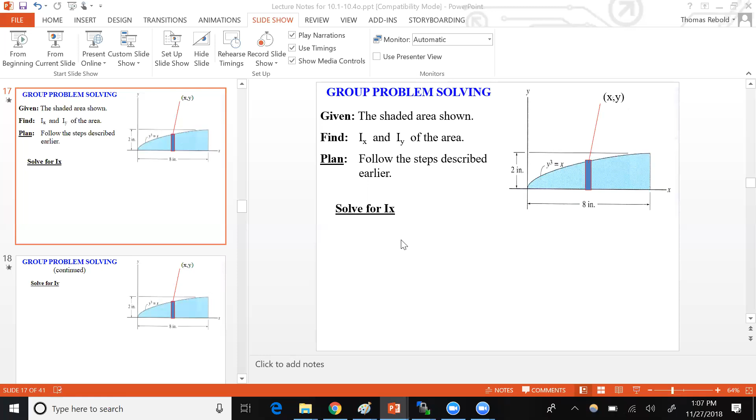So to continue, we are doing moments of inertia. Any thoughts about moments of inertia? It's weird, but it's really just calculus, a certain type. You've done all these kinds of things before, it's not too different from what you've been doing in calculus. We solved a few problems together and learned how you can do vertical strips and horizontal strips and all that stuff.

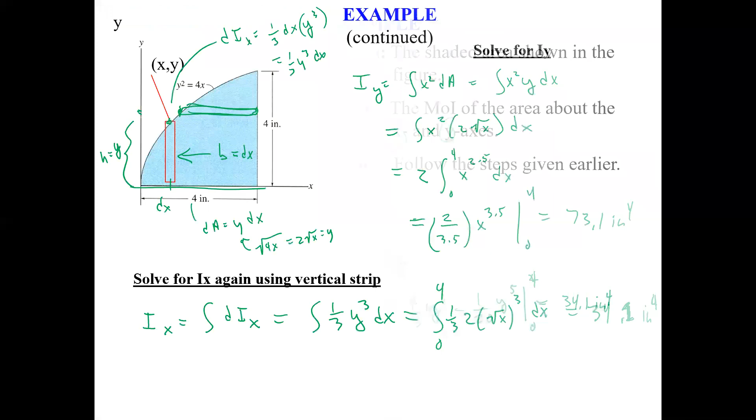There is this, I don't think I put this on your handout. Is this on your handout, the group problem? It is? Good, because you need more exposure to this.

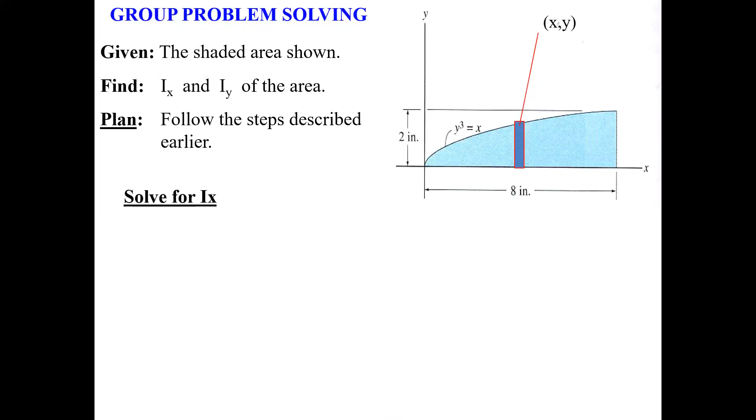So for this one, we're supposed to solve for Ix and Iy. Iy is going to be on that page, and you can do both of those with a vertical strip. Remember, there were two different ways of doing it, right? Just as a review, what were the two formulas? What's the formula for Ix?

If you have a horizontal strip, let's start with a horizontal strip. If you're doing a horizontal strip, what would the formula be? The integral of y squared dA, right? If you're using a vertical strip, what's the formula?

No, it's not. This is a vertical strip here. So there isn't really a single y for this material, for this strip, right? This strip is distributed across y. Remember what the alternative formula is if you got a vertical strip?

Instead of focusing on a dA and how far that is from the axis, since you can't really do that for a vertical strip, right? Because that vertical strip has material that's at different distances from the x-axis, right?

But we found that the moment of inertia of a rectangle about its base is 1/3 the height cubed times the width base, right? So that's sort of what a differential Ix is. You can think about this from a differential Ix point of view, and that's going to equal the integral of 1/3 of y cubed dx.

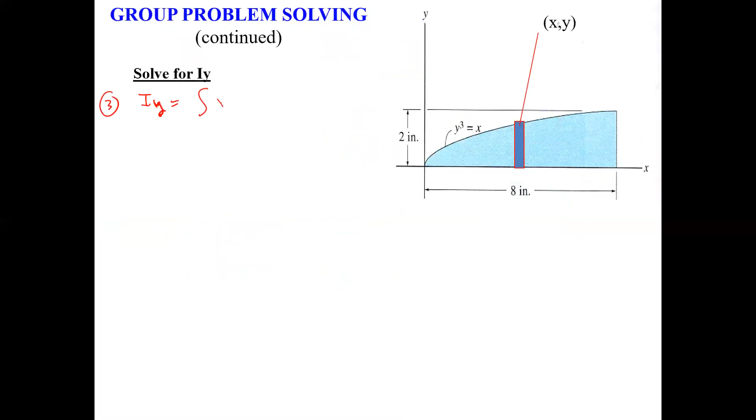I'll give you the answer, you can kind of see if you can prove it. IY is, with a vertical strip, so this is going to be formula, what's that? Formula 3. It's going to be the integral of x squared dA. And in this case, the dA is going to equal, well, the height is going to be y, which equals x to the 1/3, right? And the thickness is going to be dx, right?

And so it's going to be the integral of x squared times x to the 1/3 dx from 0 to 8. And that should equal 307 inches to the 4th. So you can try your hand at the integration and see if you can get that answer.

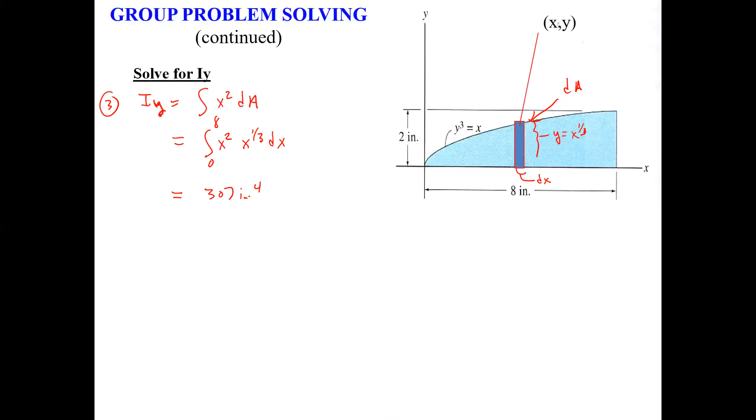Okay, and one more attention quiz. When determining the moment of inertia of the element in the figure, differential IY equals... that would be the sort of, what's the moment of inertia of this area.

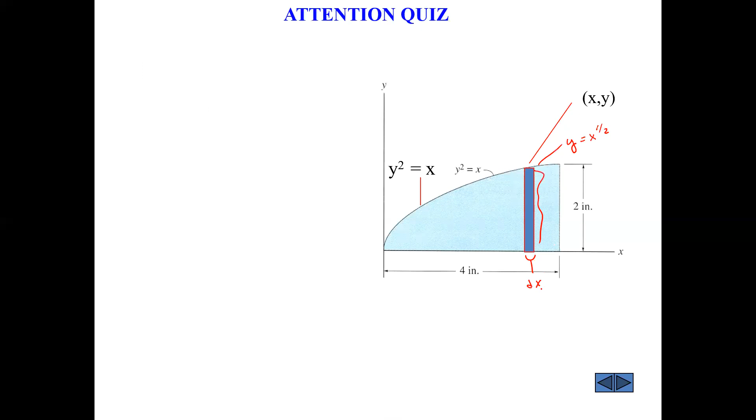Well, this thing has an area of dA, let's see, it's going to have a height of y, which is x to the 1/2, as a thickness of dx, right? And we have to multiply, so the moment of inertia of that little chunk there, our dIy is going to equal x squared times our dA, right? And that's going to equal x squared times x to the 1/2 times dx. That's x to the 2.5 dx, so the answer is D.

And dIx equals, this dIx is going to equal y cubed times 1/3 y cubed times dx. But y cubed, since y is x to the 1/2, y cubed equals x to the 3/2. So it's x to the 3/2 over 3 dx, so the answer is A.

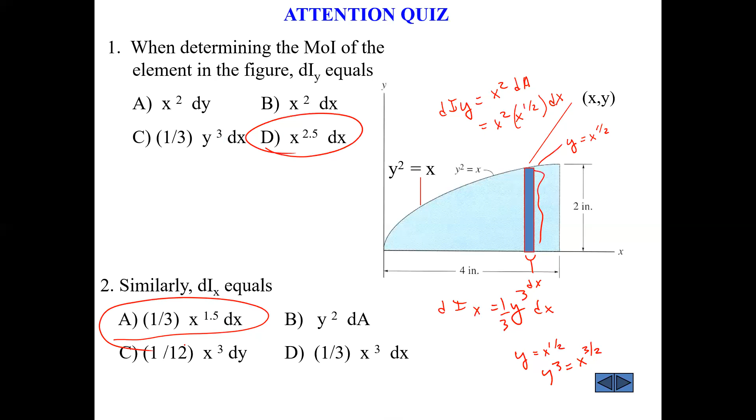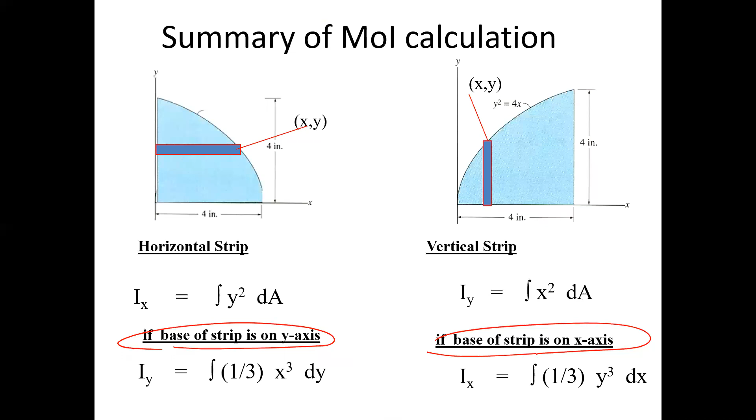Horizontal strip, vertical strip. This is the formula for Ix, this is the formula for Iy. If you've got a horizontal strip, if the base of the strip is on the y-axis, then you can do Iy. If the base of the strip is on the x-axis, then you can do Ix. That's something you want to put in your notes.

Okay, so now this is sort of the meaty part. This is going to be the basis of a pretty scary... this is so painful, I don't like this, but anyway, we have to do it: the parallel axis theorem.

So the parallel axis theorem is basically a way of, if you know the moment of inertia about a particular axis and you want to find the moment of inertia about another axis, it allows you to shift the axis by doing an offset of your moment of inertia.

Here's the scenario: you've got these axes, x and y, and in this frame you know the centroid of A, this shape, and the centroid is at x bar and y bar. A lot of times what we're interested in is the moment of inertia about the centroidal axis, but sometimes it's easier with composite bodies to find the moment of inertia about another axis. Then once you find the centroid, you could shift it to the centroidal axis and find out what its moment of inertia is about that axis.

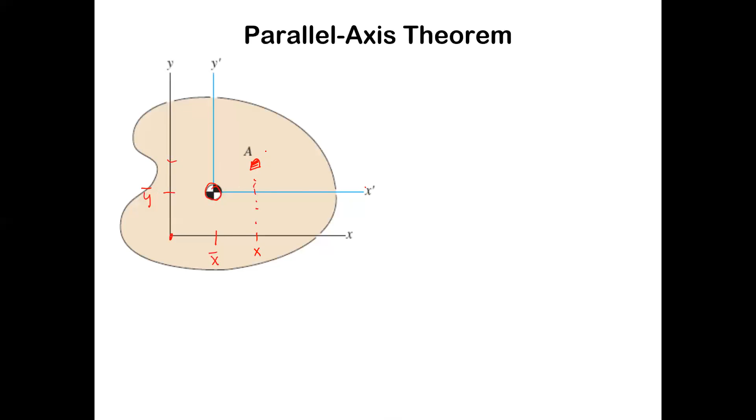That's the rationale for why we're doing this. So once we find x bar and y bar, the centroid of A, we might want to know the moment of inertia about the x prime, y prime axis, which goes right through the centroid. The point is, at some particular arbitrary value x and y in the original coordinate system, there is a little dA chunk at that x and y.

As we've been told, and as we've been using, the moment of inertia about the x-axis of this A shape is the integral of all those dAs multiplied by y squared. But you can replace y if you're interested in another axis like the y prime, x prime axis. You can replace y and consider it the sum of y bar plus y prime. So this is the location of this dA in the y prime axis, and this is the location of this dA in the x prime axis.

All these things are kind of confusing. So y prime is how far this dA is from the centroidal x prime line. If you want to reference that to the original axis, you have to add y bar back to it. So this distance here is y bar plus y prime, because this distance here is y prime. Does that make sense?

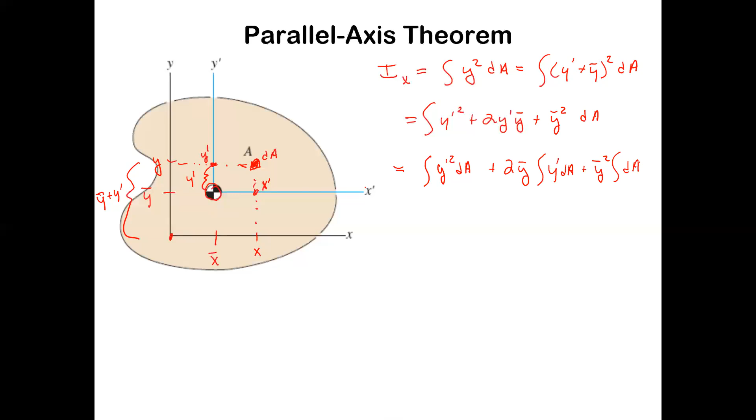Okay, well we can inspect these. What is this integral of y prime squared dA? Well, that's like the moment of inertia of this A shape about its centroidal axis, the centroidal x-axis — that's I x prime. We put this I bar over it; I think I bar is what they use for the centroidal moment of inertia, they put a bar over it for some reason. I don't know why, but I guess that's what they do. It's I bar x prime, the moment of inertia about the centroidal x prime axis, the axis that goes through the centroid of that shape.

Interesting enough, the integral of y prime dA is really the definition of the centroid in the y prime axis, but the centroid in the y prime axis should be 0 because that is actually right at the centroid. That axis is going right through the centroid, so the centroid y bar prime is going to be 0. Your axis just happens to be passing right through the centroid — that x prime axis is passing right through the centroid — so this is by definition going to be 0.

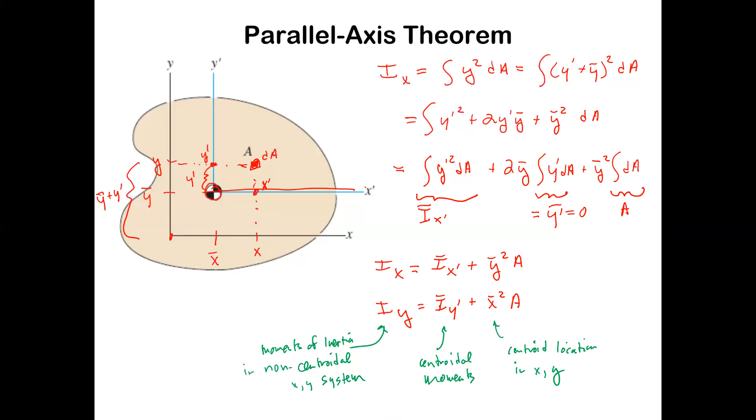This theorem is going to help us in doing moments of inertia of composite bodies, because a lot of these composite bodies are going to be shifted with respect to their centroidal axis in some arbitrary location. We have to be able to figure out what that contribution is going to be. And then when we're all done, we're going to shift that whole thing from some base axis to its own centroidal axis. And that takes a little bit of cogitation.

So, for instance, the moment of inertia IT of a circular area with respect to a tangent to the circle. Here's an example. We know I bar, that we're given this, you can find this in a lot of tables. I bar, the moment of inertia about the centroidal axis, is 1/4 pi r to the 4th. If you were interested more in the moment of inertia of this thing about the tangent to it, you can use the parallel axis theorem and say, okay, IT, the tangential moment of inertia, is going to be the centroidal moment of inertia plus the distance to that tangent from the center of the circle squared times A. So that's going to equal 1/4 pi r to the 4th plus, well, that thing has a radius of r, so we're just going to say that's r squared. That's y bar squared times the area, which is just pi r squared. And if you add all that together, you're going to get 5/4 pi r to the 4th.

So it's bigger, right? Because more material is farther away from the axis. The centroidal moment of inertia is going to be the smallest moment of inertia that body's going to have. You move away from that centroidal axis, you're going to get bigger.

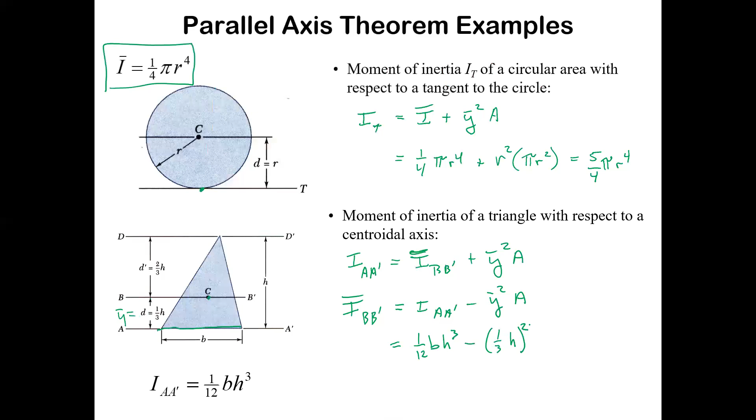So you can solve algebraically for IBB prime. I bar BB prime, that means that's just going to be IAA prime minus y bar squared times A. And we know IAA prime, so that's going to equal 1/12 bh cubed minus, and this y bar is 1/3 h. Our y bar is d, which is 1/3 h, into the centroid. We're going to square that, so minus 1/3 h squared times the area of that triangle, which is 1/2 times base times height. So that's going to give us bh cubed times 1/12 minus 1/18, which will end up telling us that our IBB prime is 1/36 times bh cubed.

So we just used it going both ways, right? If you know the centroidal moment of inertia, you can find the moment about some other axis that's offset from it. Or if you know the moment of inertia about that offset axis, you can find the centroidal moment of inertia. It's just kind of going back and forth by shifting. Essentially, you're shifting by y squared times area.

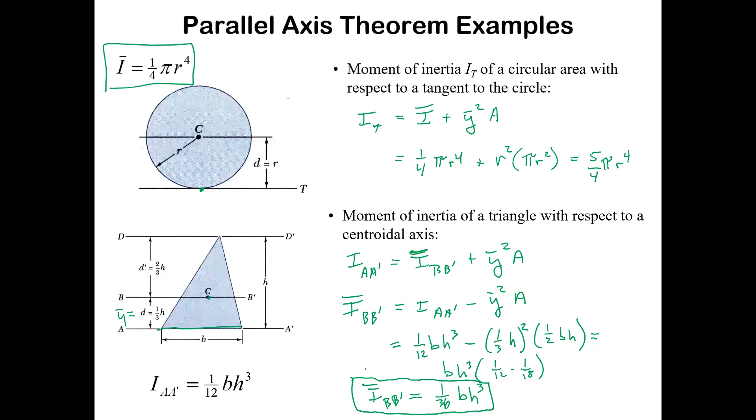Okay, everybody so far so good? Hope you don't mind if I go a little bit long today. I'm going to move kind of fast, if you can follow rapidly. Otherwise, these notes are all annotated online if you ever want to fill in any gaps in your notes.

There are tables of moments of inertia of common area shapes, and they often provide the centroidal moment of inertia, and the moment of inertia may be about some base external to that body, or tangential to the body. So those are nice. Sometimes they do, sometimes they don't. But now with this tool, you can get them if you need them.

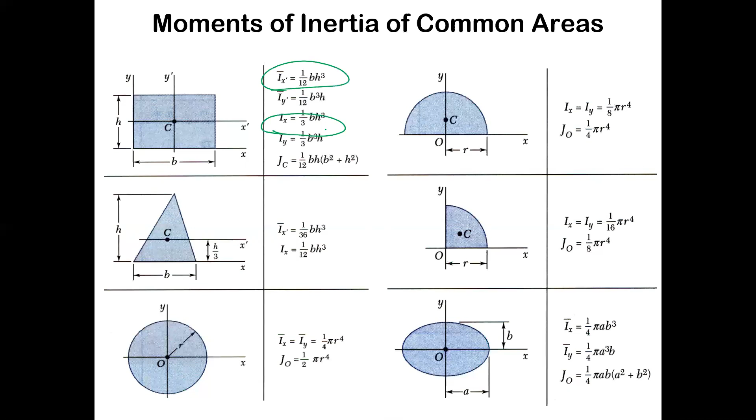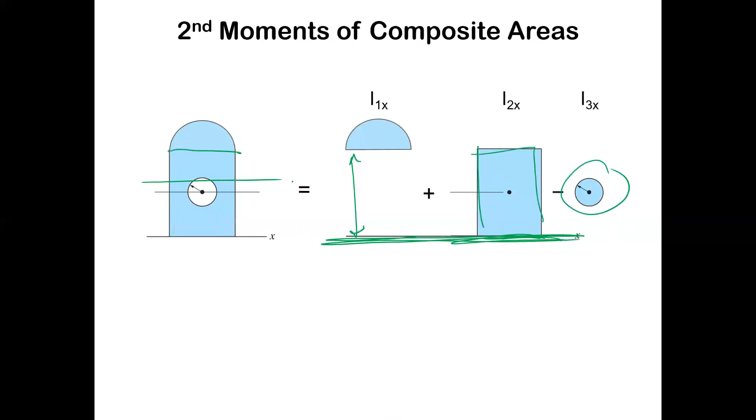When you're finished, you might want to take this further, because it's easy to reference everything to the x-axis, but then the centroidal axis of the whole body is maybe up somewhere else. We might want to shift the total answer back to its own centroidal axis, again using the parallel axis theorem. So it's a multi-step process we're going to go through.

Here we go. This one really helps to have alcohol handy when you're doing these. I can't stand it anymore. Okay, I can do it. I can do this.

So we're going to track this, and we're just going to find, in this case, IX. We're not even going to worry about IY for now. For each of these parts, we're going to break this thing into 3 parts.

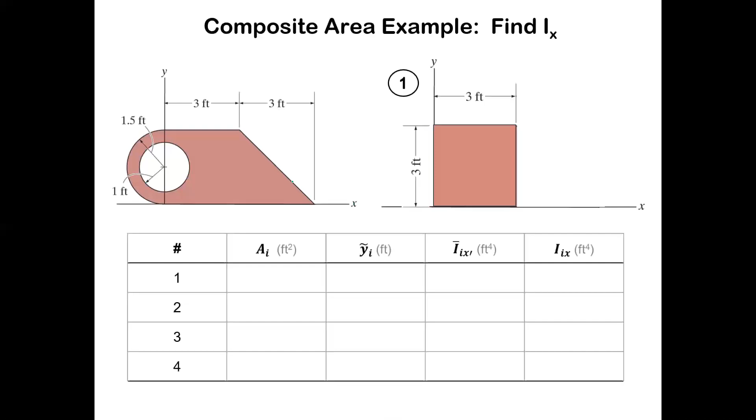For each part, we're going to have to find the area of the part, the centroid of that part, the offset of that centroid from the x-axis, and the moment of inertia about the centroidal axis of that part, if needed. Ultimately, we're going to reference everything to the x-axis and find the moment about the x-axis, so we don't have to do the centroidal moment if we don't need it.

So the first part is a 3x3 square. Of course, there's a hole there—we're going to take a chunk out of that in a later section. But the area of that 3x3 square is going to be 9.

What is the y tilde of that 3x3 square? 1.5 feet. That's the distance to the center of that thing, to the centroid of that square.

The moment of inertia, so our A1 is 3 squared, which is 9. And our I1x is that formula we derived yesterday, 1/3 times BH cubed, which equals 1/3 times 3 times 3 cubed, giving us 27 feet to the 4th. The area is feet to the 2nd. So that is a 27.

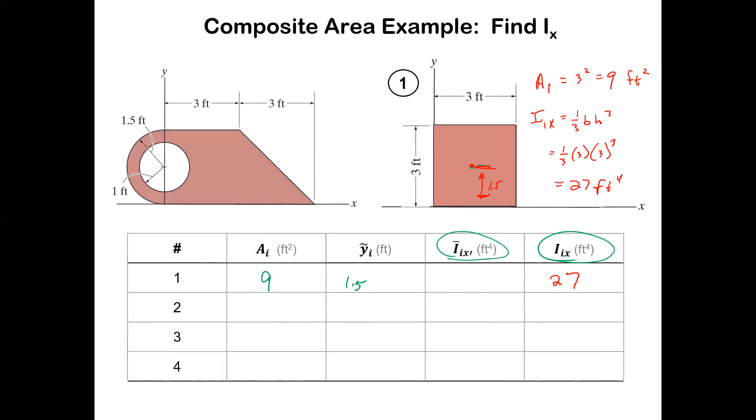Okay, we move on to part number 2, which is going to be the triangle. The area of part 2 is 1/2 times base times height, which is going to be 4.5 feet squared. And I2x is going to be 1/12 times BH cubed, which is going to be 1/12 times 3 times 3 cubed, which is going to be 6.75.

So we enter A2 as 4.5. The height of the centroid for this thing is 1 foot. And again, I2x is 6.75.

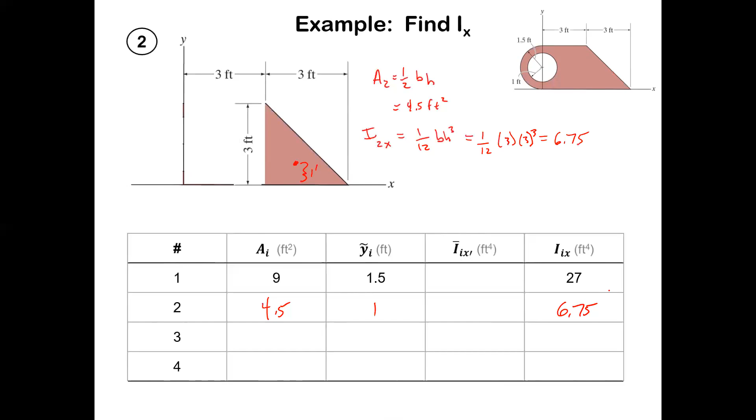Okay, part number 3 is the semicircle shape. Starting with the area, A3 is 1/2 pi r squared, which is 1/2 times pi times 1.5 squared, that is the radius, which is 3.53.

And now we have to find I bar 3 x prime. Now the x prime axis is the axis that goes through the centroid, which is 1.5 feet away from the x-axis.

According to one of the tables you can look up, for a semicircle they give you these sort of things. Here's the x-axis, here's the y-axis. In this case, IY is the same as I bar y prime because it's the centroidal axis, going right through the center, is 1/8 pi r to the 4th.

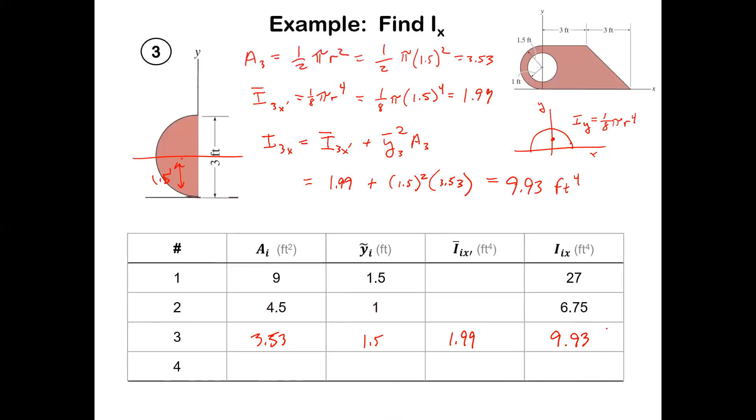That wraps up the third part. One more part is that circular hole. The circular hole has a radius of 1.

And it is 1.5 away, as everything else is, from the x-axis. The y bar 4 is 1.5, so we can put that down here. The area is minus pi r squared, negative, minus pi times 1 squared, so that's minus 3.14.

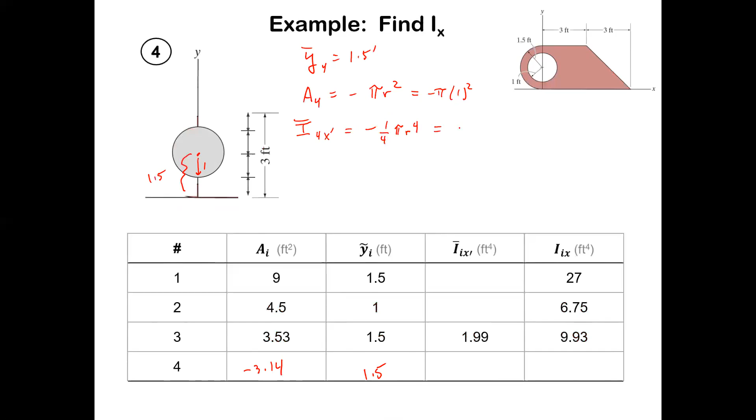The centroidal moment of that circle is given to us as 1/4 pi r to the 4th. We have to negate that because it is a hole. Minus 1/4 pi r to the 4th, and that gives us minus 1/4 pi times 1 to the 4th, which gives us minus 0.785. So that goes here.

And then again we got to do that shifting to find the moment of inertia about the x-axis. So I4x is going to equal I4x prime bar, that's the centroidal, plus y4 squared times A4. And that's going to equal minus 0.785 plus 1.5 squared times negative 3.14, which gives us minus 7.85.

That is the moment of inertia that's been removed by taking that hole out of it.

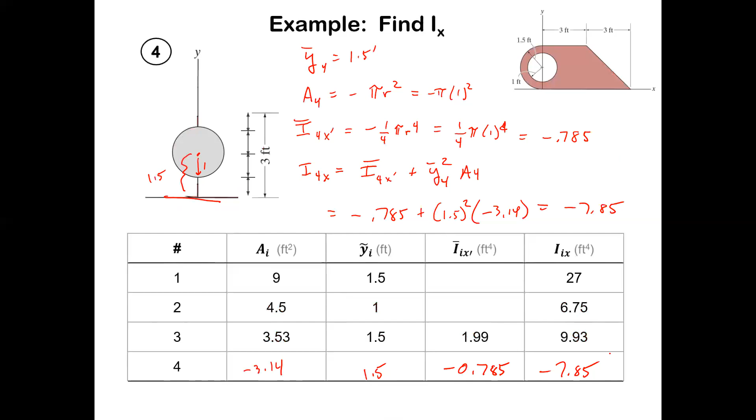Okay, so that's the hard work. Now we have to find the total IX. That's pretty easy. The total IX is just the sum of all of those IXs. And that works out to be 35.83.

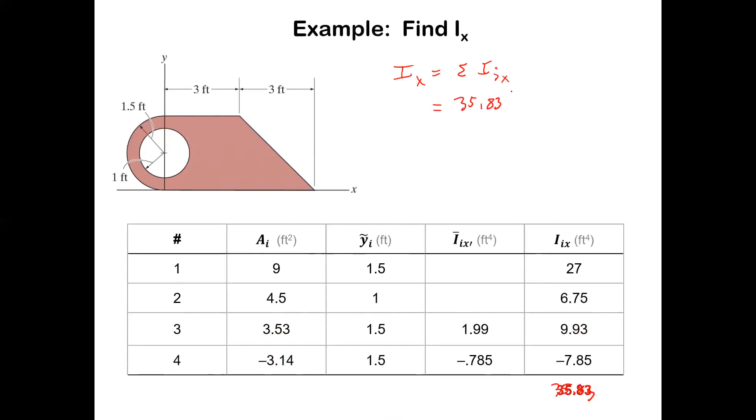But my understanding, and I'm not a mechanical engineer, is that if this thing is actually subjected to buckling, it's going to bend around its centroidal axis, not around some external tangential axis for that beam. So we would be more interested in finding the moment of inertia about its centroidal neutral axis, x prime.

And we found out what that was in an earlier lecture when we did the same thing for the centroid. We found the centroid of this thing already last week. So IX is IX prime bar plus Y bar squared times A. We just have to move our answer by shifting the x-axis towards the centroid.

So IX, which we found, is going to be IX bar prime plus blah blah blah, so we're going to solve for IX prime bar. And that's going to equal 35.83, that was all the IX's we added together, minus the distance to the centroid. We found this was...

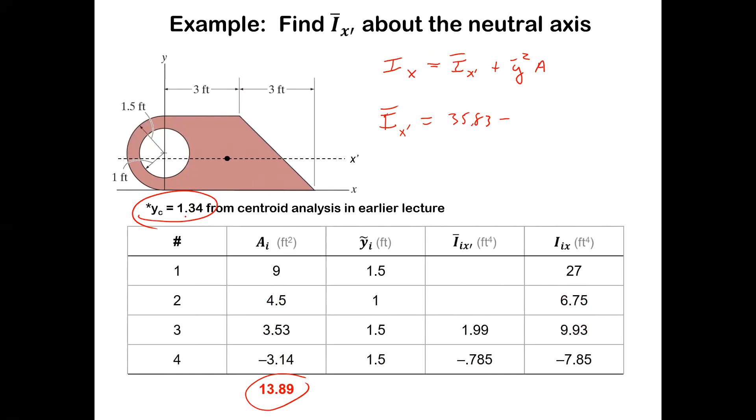This is on the handout here. Oh, and also this is the sum of all the areas, 13.89. 1.34 is the height of the centroid x prime axis from x. So 35.83 minus 1.34 squared times 13.89. And that tells us that the IX prime bar of that shape is 10.89 feet to the fourth.

So that's basically it. It's kind of a weird way to end the lectures this semester, but that's sort of where we end this class.

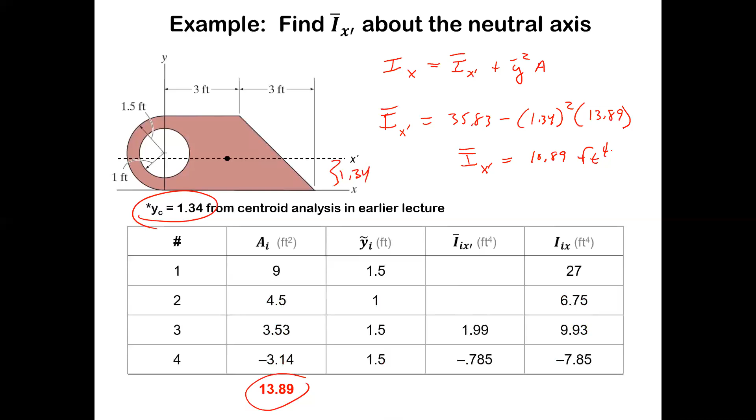I'll take any homework if you have it. There you got it, that was fast.

I'm not sure that is the answer you should put on there, you might have to do this again. You usually want to say something like I've learned it through independent study already, or something like that. Well, because I was supposed to, maybe as long as I sign off on it, it's okay. You only have a red pen. You have a non-red.